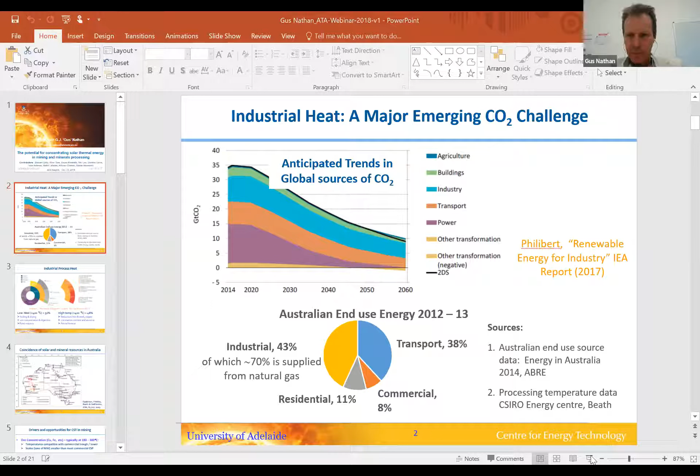Thank you, Belen, and good morning again to everybody. I'm going to talk about the potential for concentrating solar thermal energy in the mining and minerals processing sector. Commercially to date, it has predominantly been applied in the power sector, although there are increasing numbers of industry seeing the opportunity and making moves into that. It's great to have Antonio here talking about Abengoa's path there. Some of my co-authors are listed here, but there's a number of us, so feel free to contact any of us, my contact details are there.

Perhaps first, one of the global drivers, which comes from the recent IEA report, which plots the global emissions of CO2 in the main sectors projected forwards for about 50 years. We all know that power generation, electricity, is currently the dominant contributor to CO2 emissions, but we also have the transportation sector and the industrial sector. Interestingly, the other two are expected to decarbonise first, so projecting forwards, we see that the industrial sector is expected to become the dominant source of global CO2 emissions. So this is really a challenge of the future.

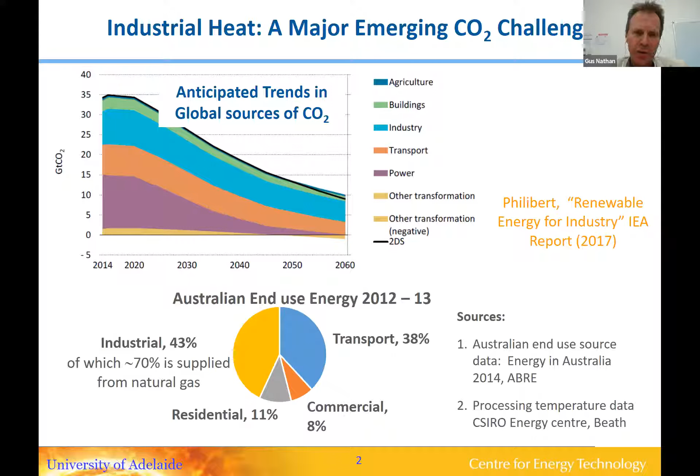So this is, of course, there's a big incidence of solar thermal there as well. But if we break the 32% of global emissions down, about a quarter of it is electricity, but 3/4 of it are heat. And out of that, about half is low temperature heat, which in this report they classified as 400 degrees, low to medium, and about half is the high temperature processes.

And of course, there are commercial systems already available to temperatures of up to 400 degrees. This is why companies such as Abengoa are interested in that. Some of them use steam, and a lot of them also use oil as a heat transfer medium.

In the high temperature range, 400 is commercial, and 600, or 480 thereabouts, is also commercial. But above that, most of the applications are in things like alumina, cement, and steel, where the temperatures are typically 800 and above. This is currently pre-commercial, but there are many technologies under development to address that.

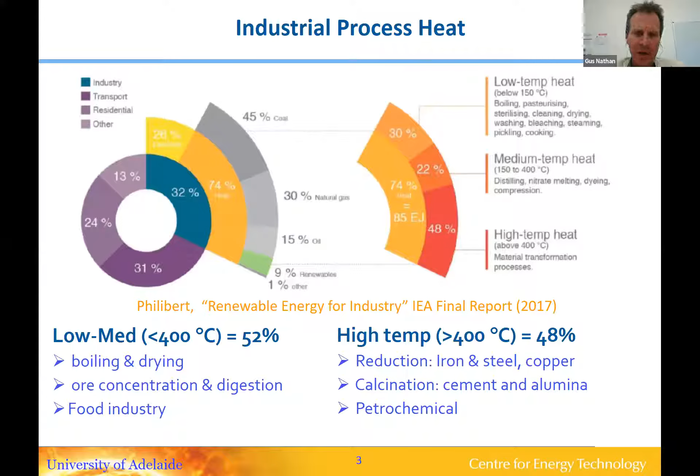I notice some people from DLR on the line who are also involved in that, as we and others are. So, Australia—particularly for those in the Northern Hemisphere who may or may not be aware—is I think an important opportunity commercially, because there is a good coincidence of the high solar resource, but also of where there are many mines.

In the mining sector itself, particular opportunities are in the concentration of ores, particularly copper and iron. Iron is the biggest single factor, but there's a lot of copper as well, for copper concentration. There, the temperatures are typically in steam temperatures of around 180 up to 300 degrees or thereabouts. Obviously this is compatible with commercial systems.

Perhaps one of the differences is that many of these systems typically need energy in the order of 10 to tens of megawatt scale. And of course, the energy is needed continuously. It's not good enough just to plug in when the solar resource is available and get stored energy through the summer—it needs to be available all the time.

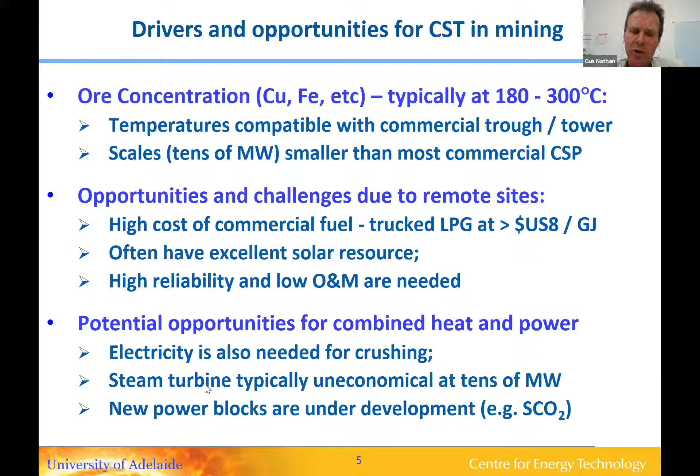So there are still opportunities for emerging players to move into that scale, and also steam turbines in the order of 10 megawatts or so typically are less economic at that scale. But of course, there are many emerging systems such as supercritical CO2, which may become applicable into that scale in the future.

Now, I'm not going to go into the details, but of course, in minerals processing there are many opportunities for energy—both electricity, through or potentially in fuels, or direct use of solar, concentrating solar, for example, in directly providing heat into such a process.

This is a preheater tower from a cement plant, but similar towers with cyclones, etc., are used in alumina, although slightly different in shape. And we have a big project with the alumina sector that I'll say a little bit about.

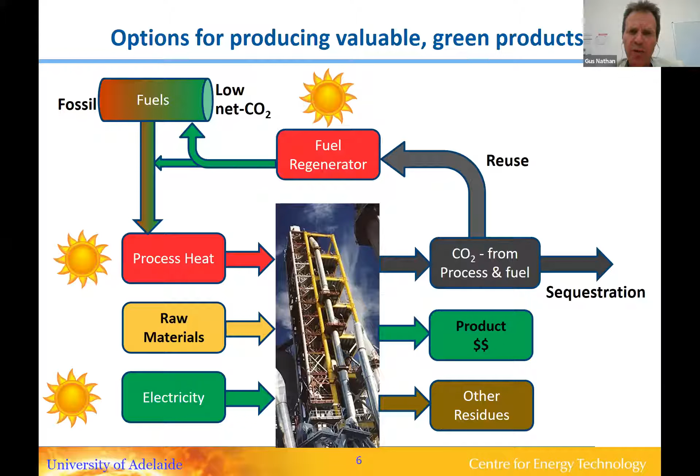But first of all, one of the drivers for using the heat directly in a process, rather than putting it through a power cycle, is that we have the potential to avoid the power cycle losses of a power cycle, a steam turbine, or whichever power cycle is being used.

There are a number of commercial systems available using towers to collect heat, which is then put through a thermal storage unit. This low-cost storage is, I guess, the key driver for concentrating solar thermal commercial systems today.

This heat, if put through a power block, has to go through the inefficiency of the cycle, about 35%. But if we can use the heat directly in an industrial process, we avoid that inefficiency, meaning we can use the heat twice as efficiently and maybe up to 3 times the economics—except that to use commercial systems, we're limited to about the molten salt temperature.

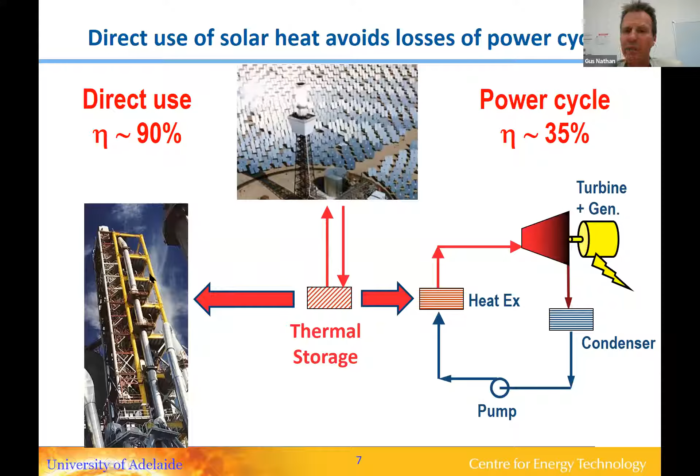So to reach temperatures such as a calciner requires new technologies that need to be developed, and there are many of these under development, although they're not quite commercial yet.

In terms of the cost curve, this is some recent projections of the cost of hydrogen in Australia from our government lab, where typically the cost of hydrogen predicted out to 2025 is still about double that of the cost of natural gas in Australia. But nevertheless, the cost of heat estimated from what we would typically expect from solar thermal plants is roughly competitive with the natural gas price.

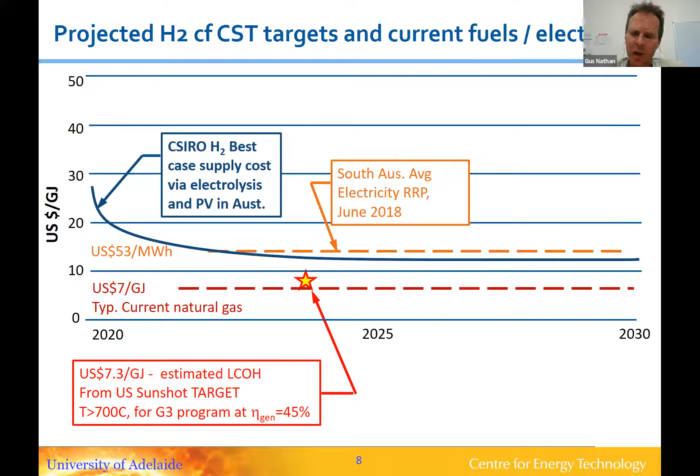So this is one of the drivers why heat could potentially become economic in these kinds of applications. One of the programs we have is a big partnership with some of the players shown here.

Alcoa is the industry partner, the end user. Hatch is one of the technology providers. We also have ITP, a solar thermal company. We have CSIRO, the government lab, and also the University of New South Wales as a partner. Adelaide is leading this particular program.

We're looking at the opportunities with the target of seeking a viable pathway towards 50% concentrating solar in the commercial Bayer alumina process. This is a $50 million program in Australia, including in-kind contributions, funded by ARENA, the government agency. The target is to displace natural gas, which, as I mentioned, has an Australian dollar price of $10 a gigajoule.

We're looking at 3 different components of this system, starting with what is commercially available today, through to technologies that are emerging and on the horizon. So the transition would take some time, but could begin soon.

For the lower temperature process, we're looking at the combination of what could be tower or trough technology. Probably tower looks like the one to give the greatest solar share because of the storage. Steam is needed at about 180 degrees C to do the digestion stage of the process—bauxite through digestion—and then a calcination, which currently runs at about 1,000 degrees, but probably could run lower.

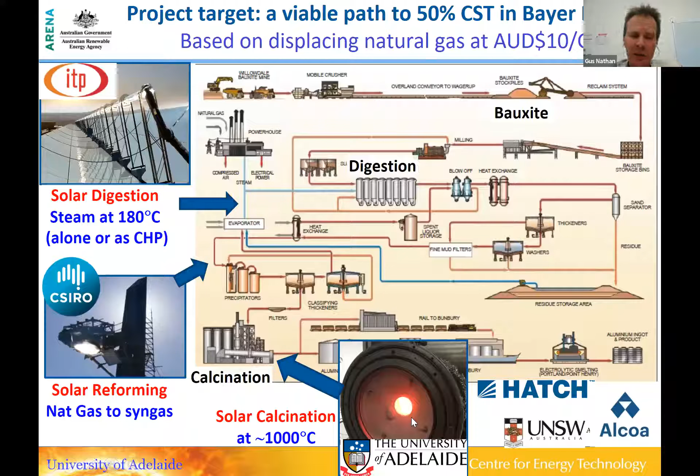The pathway would then progress—hopefully where we are today, completing the evaluations—and then within a timeline of about 2 years, potentially the solar thermal commercial technology could be installed to displace some of the steam, which is currently run on boilers and some gas turbines.

Then as the other technologies scale up through to commercialization, there would be a fuels and/or heat process put in. If the natural gas pipeline was also to have some hydrogen, for example, put into it, this would put a pathway in the future to decarbonize the process. We're not working on that part with this program—we're working on these 3.

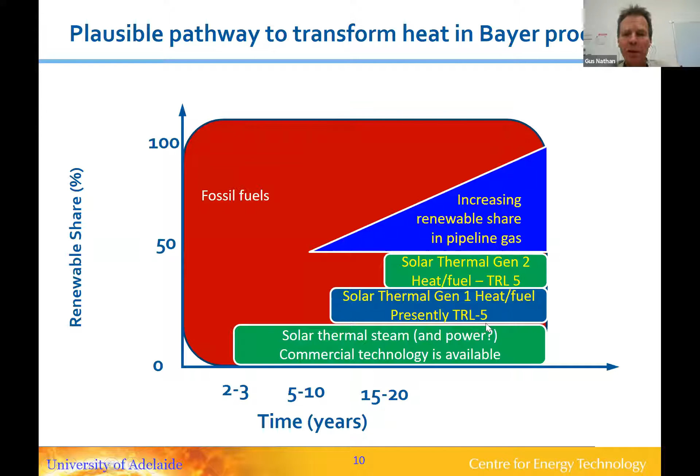So there's a lot of work being done on this process. In particular, Keith Lovegrove, some of you may know from ITP Power, has been leading this part of the work.

But also with CSIRO, looking at the actual integration parts, working with some commercial suppliers to get some data and costs, and finding out what kind of solar share, what economics would go with that.

We estimate the details will be published. We estimate that there will be some subsidy required in the first installation, probably because the location of this site is a brownfield site, not a greenfield site, and the solar resource is good but not outstanding. But nevertheless, after several installations, it would then become economic without a subsidy.

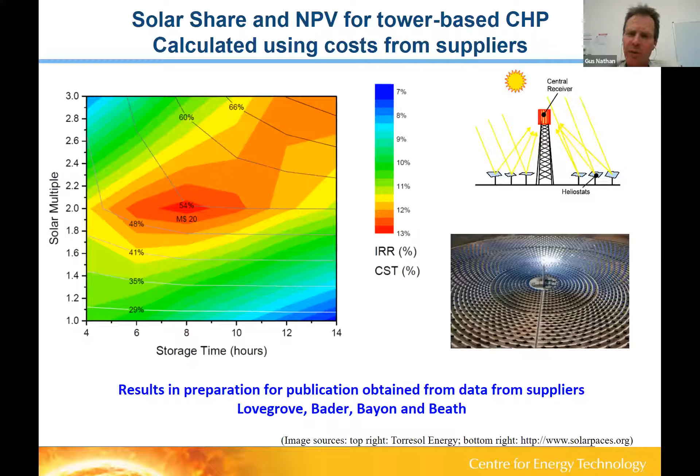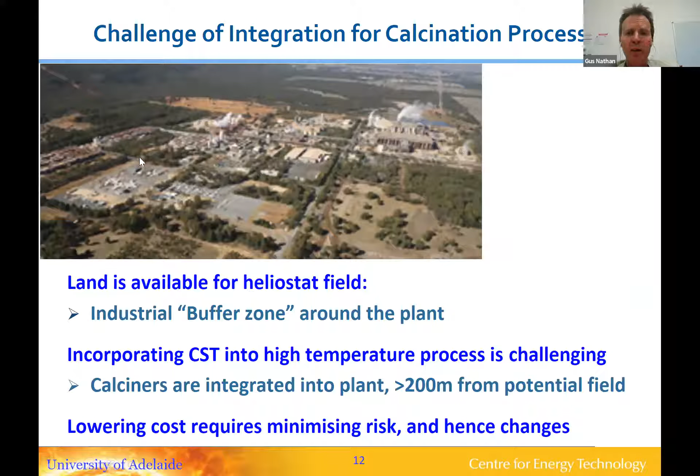And then the other two processes, we're looking at integration. You can see this is one of the Alcoa sites. There is plenty of land around, and we're looking at how this could be integrated by putting in either a calcination process, which hypothetically you could take the alumina out and do some calcination remote and then bring it back in, or you could bring in a heat transfer medium, and we're looking at hot air as being the medium. And again, there are some commercial systems available, but not yet quite the temperatures that we're looking at.

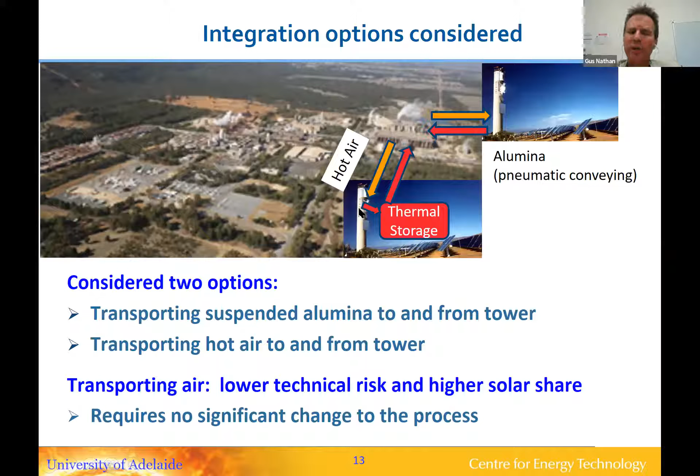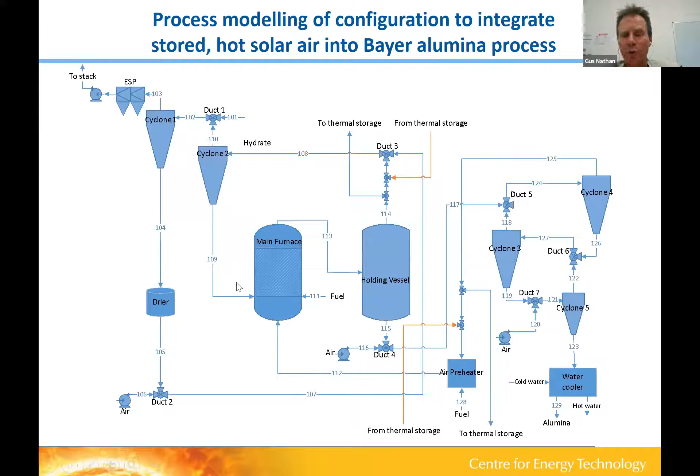So we're looking at the technologies that are available, and also storage systems. We're doing the integration, and I won't go into the details of the process analysis. We're modeling the process and then looking mainly at the energy flows within it, how that would be integrated, and combining that, comparing that with the current data, and then looking at the costs of it.

To give you an example, the systems we're looking at depend on the solar multiple, which is the size of the receiver at peak solar noon in the middle of summer, compared to the heliostat field relative to that. So typically with a solar multiple of about 2.5, you'd be talking about a 30% reduction in CO2 at the site at Pinjarra, which is where this site is.

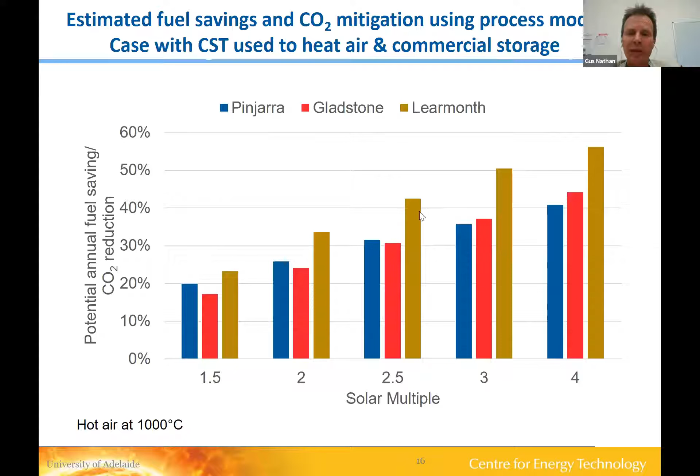Of course, if you're in a location with a better solar resource, such as Learmonth, where there is bauxite but not yet any mine, then the solar share could be even greater.

So what do we see as a highlight summary of where we see the opportunities and the drivers for this? It's now the Bayer process, of which the low temperature process is commercial, similar to what could be applicable at a mining site, although somewhat bigger. But we think that over this whole process, displacing somewhere between 20 and 50% of the fuel with solar heat seems to be realistic.

And we think our estimates of the economics are not yet completed, but we think it would be economic - with, not perhaps on the first of a kind, probably not, there would need some support - but after 2 or 3 installations, then they could become economic compared with the $10 a gigajoule if the solar resource is reasonable. And we're looking at technology options that require no significant change to the processes.

The pathway from commercial steam is obviously commercially available today, and that would be something like the 17% share. Then the pre-commercial technologies are the reforming of natural gas and the high temperature process heat, each of which would achieve a similar solar share, so that collectively this kind of target would be realistic.

But of course, the exact solar share will depend on the resource, and also it's somewhat an economic decision as to what level of storage is desirable.

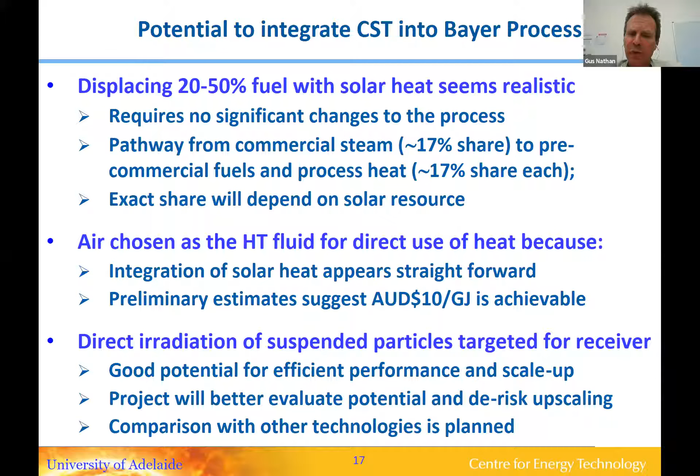So that's kind of the direction, and we'll look forward to taking questions later on. Thank you.

And whilst Antonio shares his screen, I'd like to comment on a couple of things from one of our audience members, Arnold, who actually introduced me originally to Gus. He sent two really interesting stats: one says that Australian mining requires 5 times more energy than Chilean mining, and the consumption of Australian mining, considering fuels, electricity, and heat, equals the total electricity consumption for Spain. So that's quite a lot of energy, I have to say.

Brief introduction of Abengoa - who are we? As I mentioned, we are focusing on energy generation and water generation. You see four activities on your screen: energy generation, where we include all renewables; we're also involved in conventional generation, currently building a $1 billion power plant in northern Saudi Arabia, in Turayf. Biofuels is an activity we're also involved in and pushing, involved in the early stages where R&D is required. Transmission and distribution is one of our elements, where Abengoa was created, and it was the activity that sort of pushed the company to where it is today.

In water and environment, we are very much involved, especially here in the Middle East, building 2 plants right now, going into the 3rd in Saudi Arabia - desalination plants. As you will know, the market in desalination in the Middle East is quite strong, and we are involved in a number of projects. We're also looking at the possibility of adding renewable into the desalination process, and this is something we will present next time with Belen, hopefully - what the capabilities are and how we see this technology applied into the desal process. And finally, infrastructure and services, an activity that spans transport, railroad, manufacturing, and so forth.

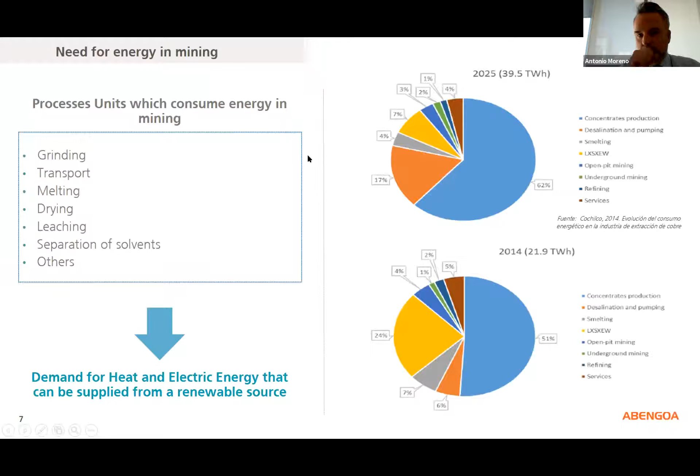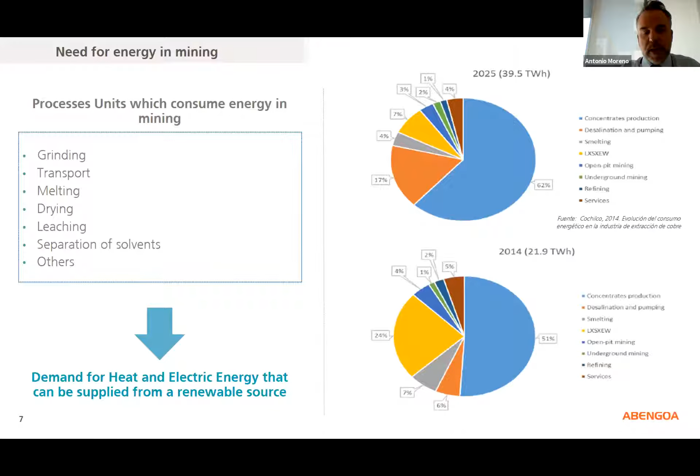As you might imagine, mining is a process that requires a whole lot of energy from the different steps - grinding, transport, melting, separation of solvents, etc. So there is a huge demand for heat and electric energy that is part of the mix and part of the product of the mining process. Renewables, both for energy generation and steam generation, has been used, and we've been involved in Atacama in Chile on a mining process generating electricity. But in particular, for solar thermal, it's a source of sustainable energy supplying mining - why? Because it supplies steam heat for unit processes.

We were looking at that range of design temperature that we don't have to go as a CSP application into 500 degrees Celsius with a large parabolic trough. We are in the 250, 300 Celsius range in this particular application, but we can range.

The renewable technology allows us to implement different technologies according to the best applications, which is this flexibility we think is one that is going to take CSP in particular to the next level.

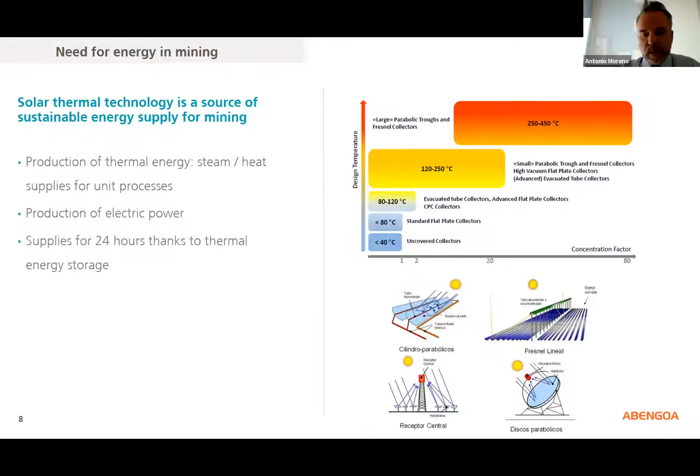Abengoa is currently involved in the 600 megawatt construction in Dubai for the Al Maktoum renewable DEWA 4 project, and this is an application that has reactivated CSP. We have worked tirelessly from the entire value chain to bring it to the competitive level that was given at the submission at the end of last year. And as I said, we are in the process of executing that project.

In terms of thermal energy production, where are we? What kind of references have we developed in the past? In Atacama, like I mentioned, in Chile since 2012.

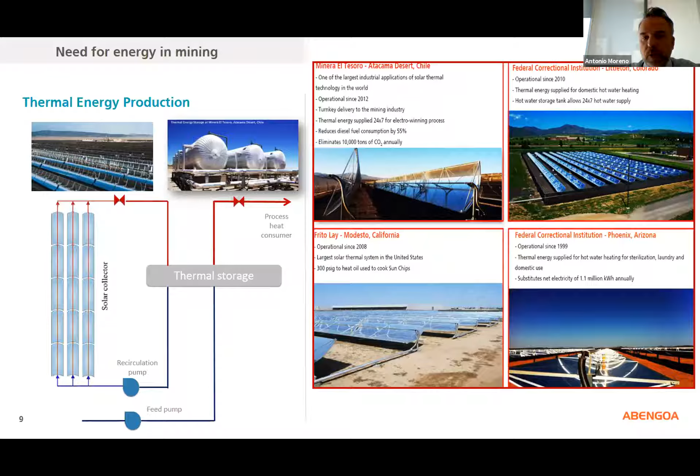You see on the top right a correctional institution in Colorado, which has also been in operation for a number of years with hot water storage. On the bottom left, we have a large thermal system in the US, also used for an industrial process, and you see another reference there in the bottom right.

So regarding mining, I put together a bit of a summary of the main points. This project came in response to being approached by a mining company in Antofagasta, Chile, where they were currently using diesel oil to heat from about 55 to 80 degrees Celsius.

They wanted to see what kind of solar field application was feasible in order to replace at least 60% of the fuel use. It's a large industrial solar application, delivered in the Atacama Desert.

What we did in the design, we put together an analysis process where we analyzed a parabolic trough energy collector with direct thermal energy storage, TES. We used water for the heat transfer fluid in the solar field and in the storage for the TES tanks.

The main goal was to predict the performance we wanted to implement, and to transmit the best optimal solution to the client. We wanted to use as a benchmark a comparison to the required oil and how much oil we could displace in order to optimize the amount of TES.

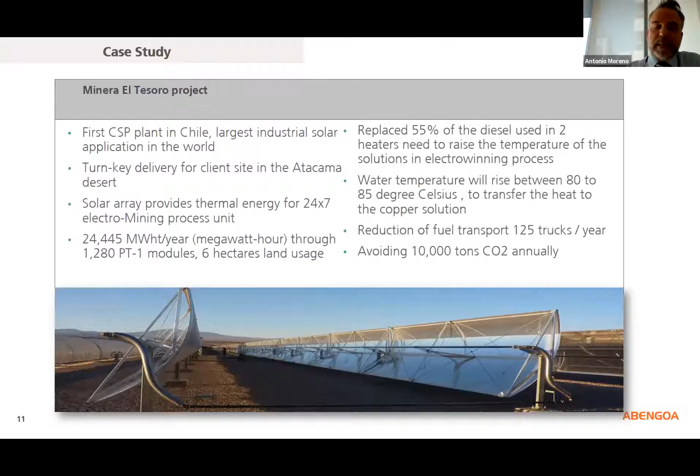It was needed to raise the temperature of the solutions. So it's a project that is saving 10,000 tons of CO2 annually, and it's a project that is really an example of what this technology is bringing us in the coming future. We see a possibility in both the mining sector and pharmaceutical and industrial processes where steam is required.

In order to analyze and come up with the most reliable solution, we saw that it was quite critical for us to understand the process and the requirements, and what was the critical aspect for the client to go into a renewable solution.

At the end of the day, CSH is a technology, and in this particular application we went with a maximum solar field outlet temperature of 185 degrees, close to 200 degrees, which is a reasonable temperature and quite common for an industrial application.

We were able to reach 14 bars of tank pressure. That was also a requirement given to us by our client. Like I said, we use heat transfer fluid as water, which was also a way to optimize and make the application as efficient as possible.

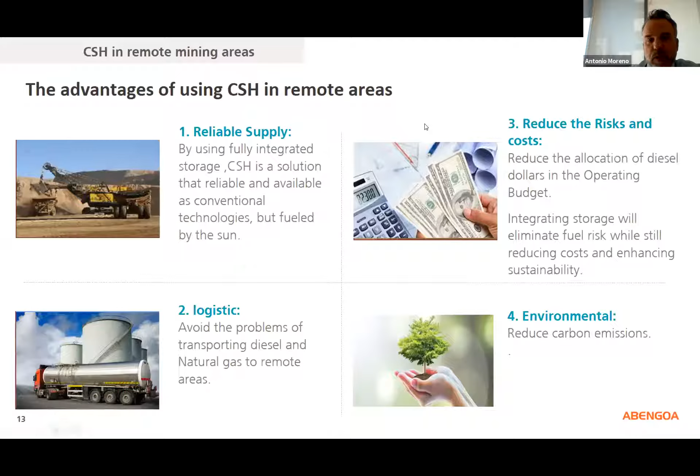And finally, worth mentioning, the savings and the good reduction in carbon emissions—an aspect that Abengoa has always been very critical on. So that is a bit of what we've done in this project, and we're open for any questions that you might have.